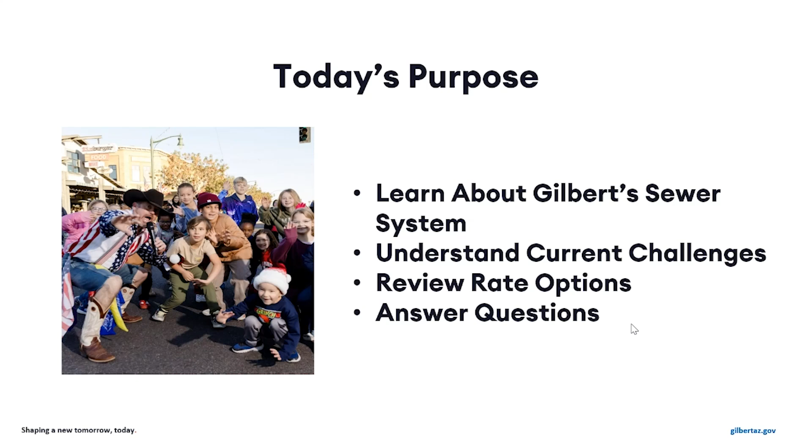We have to come face to face with the reality that's before us. Some parts of our sewer infrastructure are silently crumbling and are near total collapse. The condition of our infrastructure in maintaining reliable service is the underpinning for this entire conversation tonight.

We have 3 500-foot sections of ductile iron pipe that cross under the 202 freeway, and this one highlighted is just north of Williams Field Road. Although our goal is to inspect the entire system every 6 years, it's been 8 years since our last inspection of these pipes, and what we found just a couple of months ago was alarming.

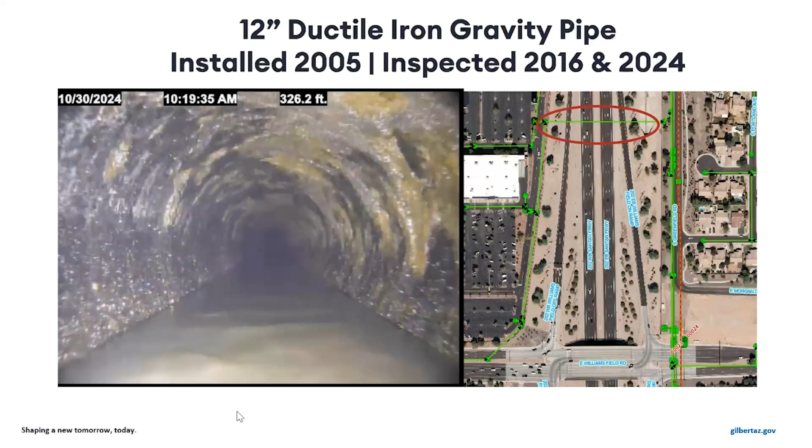These dark spots that you see are holes where the iron pipe has corroded completely away. Ductile iron pipe was a best practice 20 years ago when these lines were installed, but are not anymore due to its corrosion potential. This gravity line is inside of a 24-inch steel casing that has concrete plugs at both ends, which is containing sewage that may be leaking out of the sewer line and is helping prevent a sinkhole. But we don't know the extent of the corrosion that the casing may have as well.

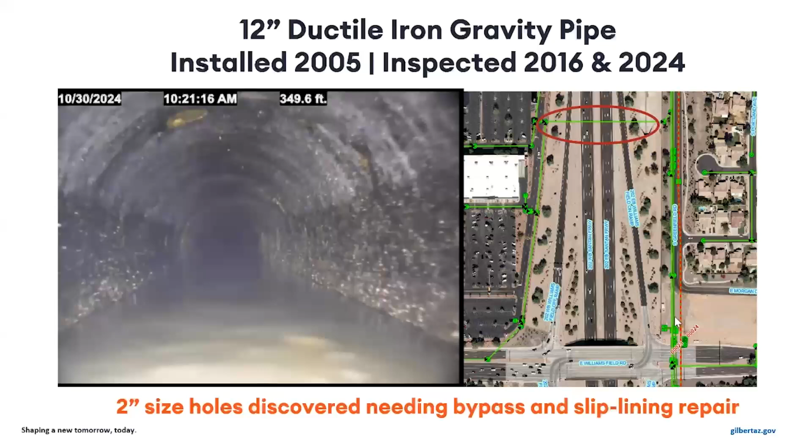Now, our team has just completed camera inspections of all 3 of the pipes that are crossing the freeway, and we're actively pursuing emergency relining. We've also expanded this inspection to other potential gravity pipelines and have already found one other significant issue crossing the railroad track. Catching this before a failure really shows the value of our routine inspections. Although these repairs will be costly, in the several million-dollar range, a sinkhole in the freeway would be life-threatening.

It's just a snippet of some of the infrastructure that we're dealing with today in Gilbert.

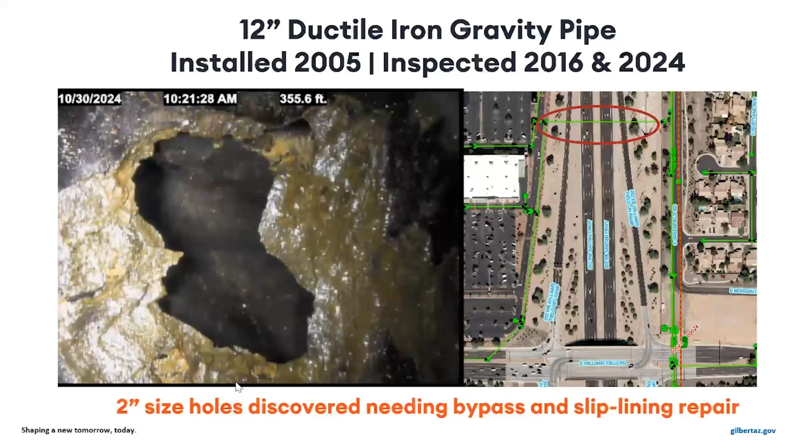Now, there's an infrastructure funding gap that is national in scope. Every 4 years, the EPA sends Congress a report on infrastructure funding needs for clean water utilities, which are synonymous with sanitary and storm sewers. The EPA also does a survey for drinking water, which is separate from the one before you here. The EPA provided the estimate of $630 billion over 20 years nationwide that's needed to bring these sewer systems back into the acceptable range for functionality.

And Arizona's portion of that was $4.8 billion. So this issue is not unique to Gilbert, but we are aggressive in keeping our promise to the community for quality service, which is why we deal with our funding needs head on instead of passing them on to future generations.

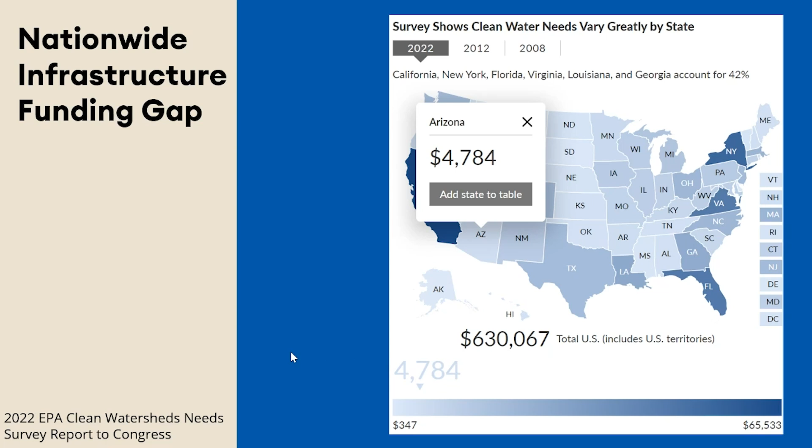Now, oftentimes when you make a personal or a professional or even a team goal, you visualize what you want to become. We definitely do that in Gilbert with our City of the Future metrics and our performance management program. But sometimes it's more instructional to look at real-world examples of what you don't want to become to help guide your decision-making on the path you do want to take.

Johnson Utilities was just a few miles southeast of us in the San Tan Valley, and they were plagued with sewer overflows, undrinkable water and high utility bills for many years.

Finally, the state took regulatory action and forced the sale of the utility to another private company called EPCOR, and they're making significant investments to bring the infrastructure up to standards. Sewage running through backyards and washes is not what we want to become in Gilbert. So tonight I'm going to share with you some of our pains as well as our plans to making sure we are a reliable and environmentally stable sewer and reclaimed water utility.

Well, here we are again talking about a rate process. And it probably feels to you like there's been a significant rate increase every year for the past 3 years. That's because there was a 12-year gap with only one rate increase during that time, which left these utilities well behind in keeping pace with our rising expenses and cost of service.

Each year, we develop and review the budgets of all 4 of our utilities, but only make revenue adjustment requests for 2 of them each year, and only if they're needed. This year, the rate revenues are being reviewed for wastewater and for our environmental compliance fund. Last year, we reviewed water and trash service. Now, it should be noted that although these alternating year reviews are planned, it doesn't mean that we're going to bring forward a rate increase recommendation each time. You can see that we even reduced the trash rates in both 2012 and in 2018. We always base our rate recommendations on the needs of the utility, along with the best available data to support those needs at the time that we made the recommendation.

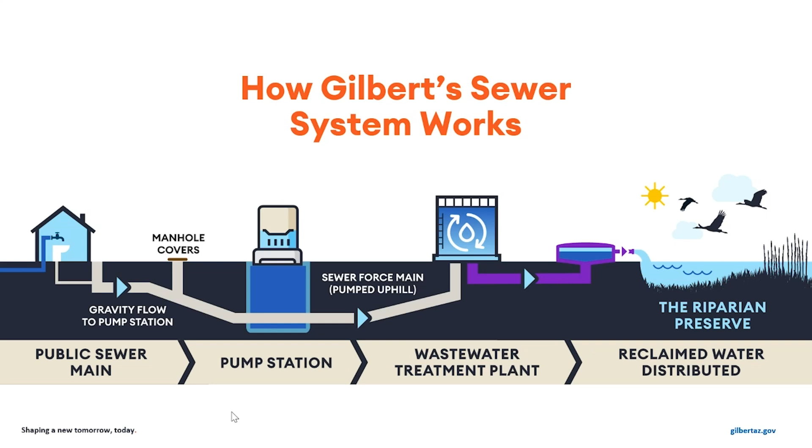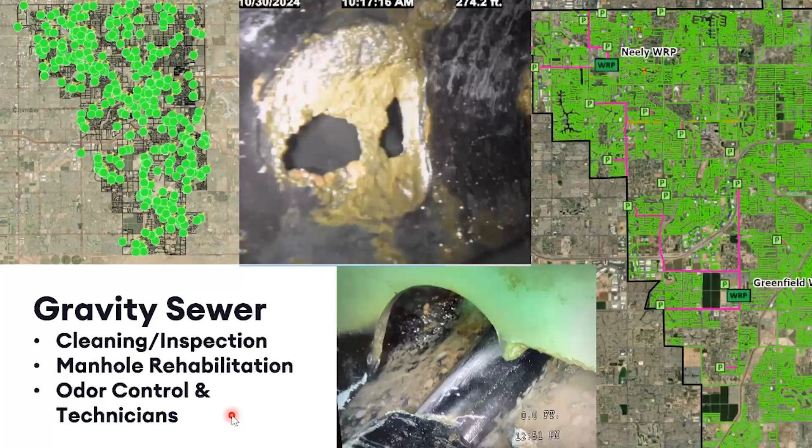We do a lot of cleaning and inspection work on the gravity sewer system, which helps mitigate highly corrosive sewer gases that eat away at the infrastructure from the inside. And those sewer gases are also a nuisance for the community. Inspections help identify small issues before they could become big, like the photo at the bottom, which is a pipeline that has been bored through that our team discovered before it became a big problem. And sometimes they uncover big issues before they become catastrophes, like the video that you saw at the beginning of this presentation.

Those inspections also help us identify future problem areas that can be corrected with capital projects, like our manhole rehabilitation project, which will fix hundreds of compromised manholes. They also guide our new odor and corrosion control stations in response to odor complaints we've received. Our plan includes additional future staffing to maintain those stations, which will be both proactive care for our pipes and a quality of life improvement for the community.

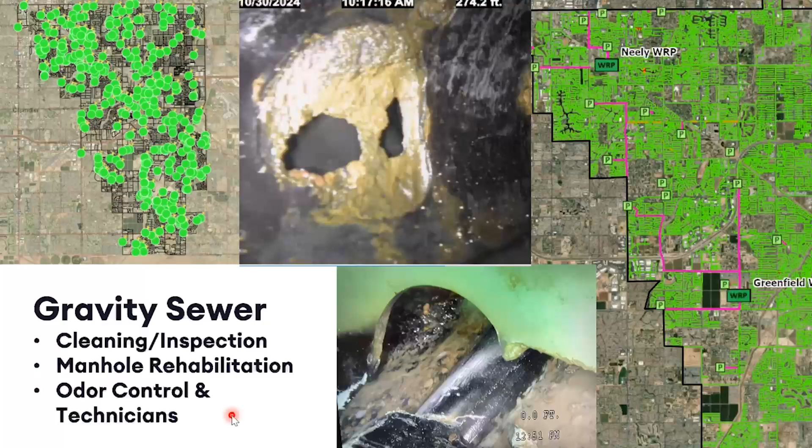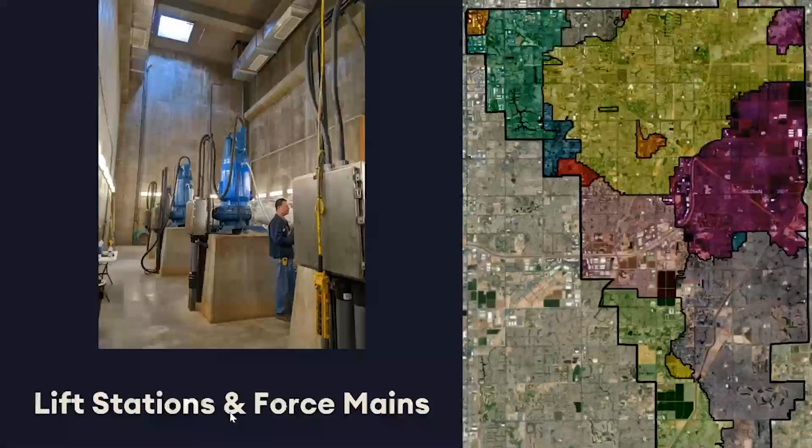As I mentioned before, lift stations are a vital function of our system. This photo on the left is of our largest lift station, called Crossroads. You can see the very large pumps behind Roy and the force mains that lift that sewage to where it can be pushed to a gravity sewer to continue its journey to the water reclamation plant. That facility is 5 stories, and that skylight you see is actually at ground level. It's all below grade.

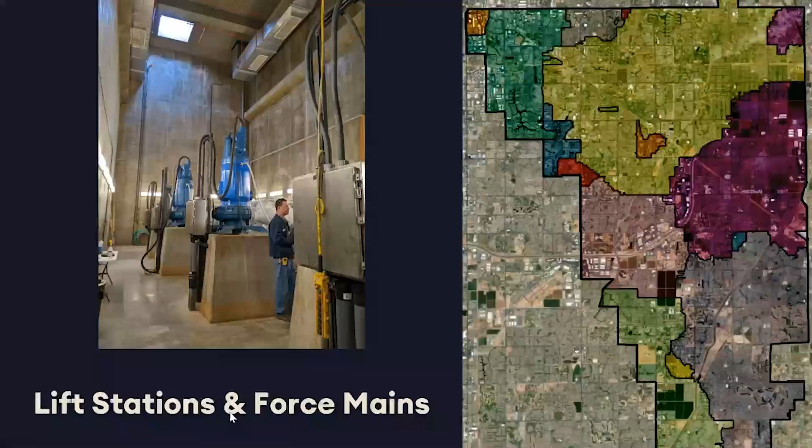The map on the right highlights the lift station sewer sheds in Gilbert, showing that over 60% of our sewer flow passes through at least one lift station on its path to the plant, which is an indicator of how vital those lift stations are to uninterrupted service.

Lift stations are costly to run and maintain compared to gravity sewer lines, which is why we try to avoid their necessity in new developments. Unfortunately, breakdowns are a normal part of this kind of infrastructure, which is why our team does daily inspections and maintenance on the equipment to help us identify potential issues before they become calamitous.

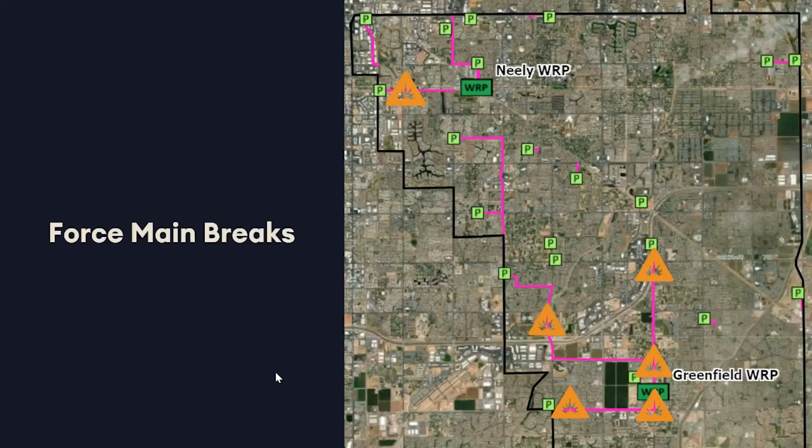We have had numerous calamities of these force mains just in the last decade. These are going to pop up on the map. The first one was at Greenfield Road and Queen Creek back in 2015. That issue cost $2 million for us to fix, which was likely only a $300,000 fix if it wasn't an emergency situation. In all of these emergencies, the cost to fix something is exponential compared to routine replacement. In all, these emergencies cost $18 million in today's dollars to fix.

And those didn't even solve the underlying issues that led to the breaks in the first place. That was $18 million in Band-Aids.

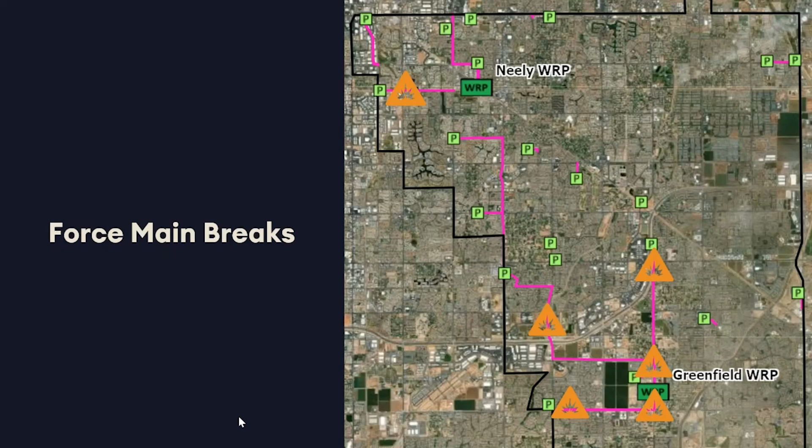There's also an above ground impact that happens when these force mains break. Sewage only flows one direction, so we have to set up bypass pumping in cases where the rupture is big enough and complicated enough that the repair will take some time. In this case, these bypass pipes were in place for several months, crossing Queen Creek Road.

Rivers and ponds of raw sewage running through gutters and into landscaped areas are not the kind of water features we want in Gilbert. And we know that you, our residents, want us to prevent them as well. These rate investments will keep us on the correct side of your desires for quality of life.

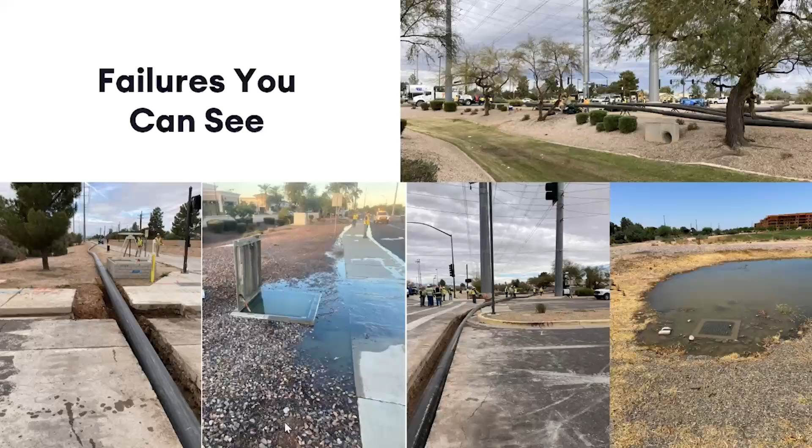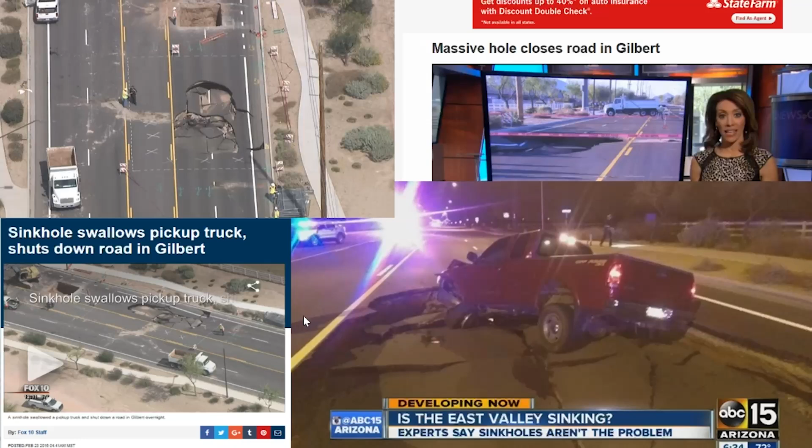The media loves a sinkhole because it's an obvious sign of a service failure, and we have gotten that coverage too. Thankfully, nobody was injured in this incident, but there was a strong possibility of that happening.

This particular instance led us to do a condition assessment of our force mains, and we developed a prioritization list for rehab and resiliency of our force mains. We developed a subsequent capital improvement project to make those necessary improvements. It's a costly but vital series of projects over the course of 12 years to accomplish resiliency and reliability for our sewer customers.

This project is called WW1050. It's a systematic replacement of those ductile iron pipe force mains that are the most likely to fail. As I mentioned earlier, it was an industry standard to install ductile iron at that time, but improvements in manufacturing technology for large diameter plastic pipes now means that we can replace those old standards with materials that will not corrode like the ductile iron. Those force mains are a single point of failure for us, meaning there's no backup in place if one of those points fail, and we will be in emergency operations.

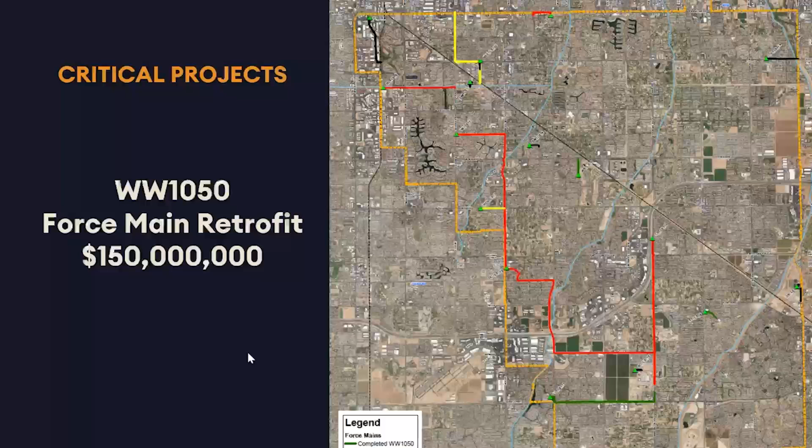Well, we finally made it to our water reclamation plants in our journey, and we have drilled down with our council into the operations of the Greenfield Water Reclamation Plant. We've shown them that the operation and maintenance costs of that plant over the next 5 years average $3.5 million above our previously budgeted amounts. This is due to a lot of contributing factors, including increased costs for chemicals, energy, and materials for the processes, growth in Gilbert's flow to the plant, and higher staffing costs.

Additionally, we keep reinvesting into this plant so we get the full useful life out of this facility in order to maximize ratepayer return on their investment. These upward costs affect our need for more revenue per customer.

We also have to do some reinvestment ongoing at the Neely Water Reclamation Plant, which is Gilbert's other plant. We have a need to bring that plant back in line with the service standard that this community has come to rely on.

Well, now that this water has been purified, we send it out through our reuse system, which is a foundational element of our sustainable water supply in Gilbert. Our goal of 100% reuse is achieved through direct use in parks, golf courses, and HOA common areas, and then the recharge of the remaining reclaimed water into the aquifer. We've got a separate pipeline network for this water. We call it our purple pipes because they're actually purple in the ground to delineate them separately from our drinking water pipes. The riparian preserve is a vital resource for our water sustainability, which enables our full use of reclaimed water by recharging the aquifer and therefore maintaining equilibrium with our groundwater pumping.

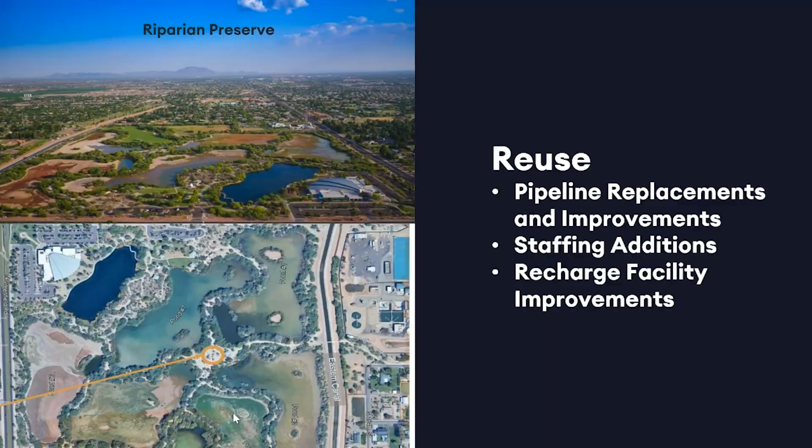Okay, we've made our way through the sewer and reclaimed water system, and now we're going to dive a little deeper into some of our capital improvement plans. We have two types of capital plans that are funded solely by rates: the operations plan and the repair and replacement plan. You can think of the operations fund as an asset that is adding a new service level, like one of those odor and corrosion controlled dosing stations that were not included in the original construction. A repair and replacement fund is when we are fixing an existing lift station pump that needs replaced because it's breaking down beyond repair. So repairing and replacing existing assets.

Now, growth-related projects are not included in the rates. They are not funded by rates. Therefore, we're not discussing any projects that are growth-related today.

Now, there's a lot of information on this slide, and I don't expect you to be able to read it, but I'm just going to describe for you what this is. This is a list of all of our capital projects in the operating and the repair and replacement fund and the years that they were slated to begin. Notice that our 5-year plan, as originally constituted, had most of the projects planned in fiscal year 25 and 26. This is a visualization of what a backlog looks like in a plan. Many of these projects were planned for fiscal year 23 and 24 in our last rate plan.

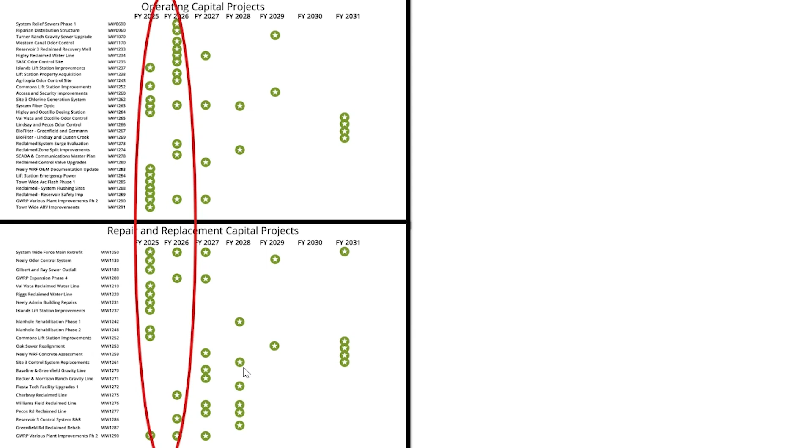We had to push almost all of the projects off for 2 years, which we then added to the ones already planned in those years. This glut of projects creates a real financial bump in the near term, which would have had a direct customer bill impact. So we've smoothed out many of those projects to also smooth out the financial impact for our customers. We had to balance the risk of pushing off these critical projects with customer impacts, both of monthly bills, but also the risk of interrupted service and environmental damage potential.

This represents a $38 million delay of projects in our operating fund and $96 million of delay in our repair and replacement fund, just to soften the rate increases to the extent possible without compromising the integrity of our services. These delays were not incorporated, the rate recommendation would have been even higher.

That initial capital plan represented a 160% rate increase. But we've left as much of that plan on the cutting room floor as possible through our risk and benefit process to get to the lower rate increase options that will be presented to you today.

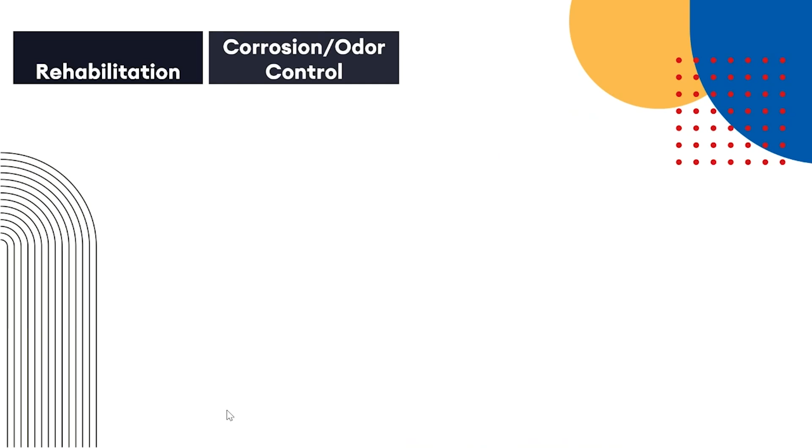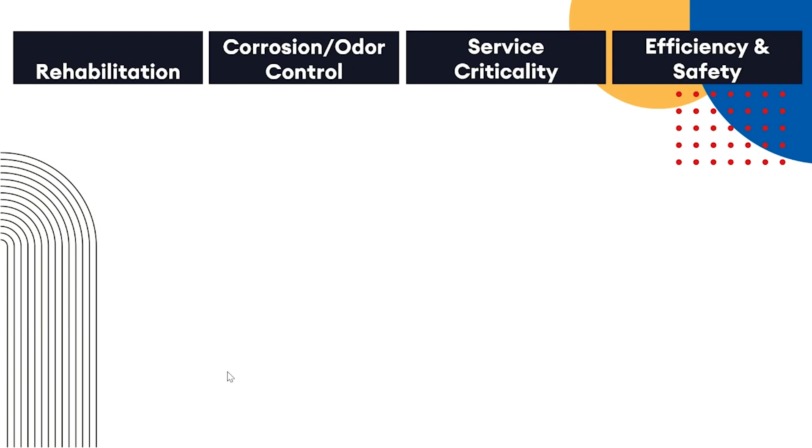Now, I realize that previous slide had so much information it could be overwhelming. Looking at a list of dozens of projects can be difficult to sort through. So here's another way to visualize the categorization of these projects. We've got 4 main categories: rehabilitation, corrosion and odor control, service criticality, and efficiency and safety. It's a little easier to understand the goals we're aiming to achieve when looked through this lens.

So when we add in the bullet list of each of these projects, it provides context for the criticality of these projects. As an example, take one of our odor control projects, say the Western Canal Odor Control Dosing Project. The impact for the area nearby and downstream of that site will be enormously improved. The Heritage District is directly downstream and will benefit. We heard odor complaints from customers dining on the patio at restaurants in the Heritage District, and we've developed that project in direct response to those problems.

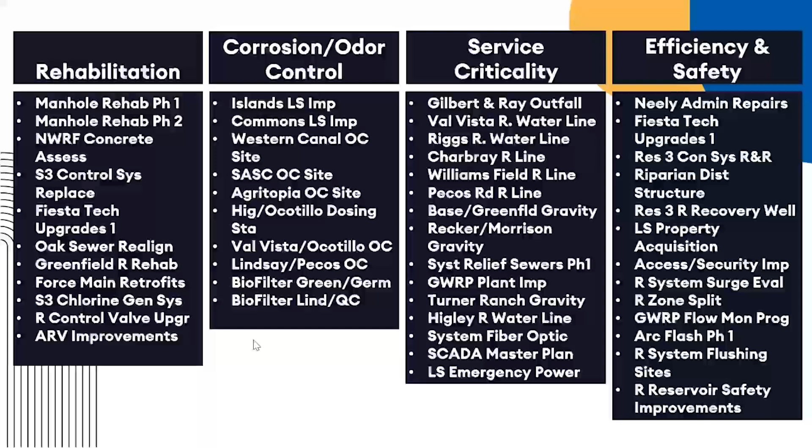The projects recommended are based on our professional opinion of what is believed to be in the best interest of the community. If we had to push out any more projects, we could have severe consequences for service reliability and quality of life for our residents.

These projects total $230 million within the 5-year plan. That's an average of $46 million a year just on capital expenses. And our total current revenue is only $48 million a year. So clearly, an investment is required.

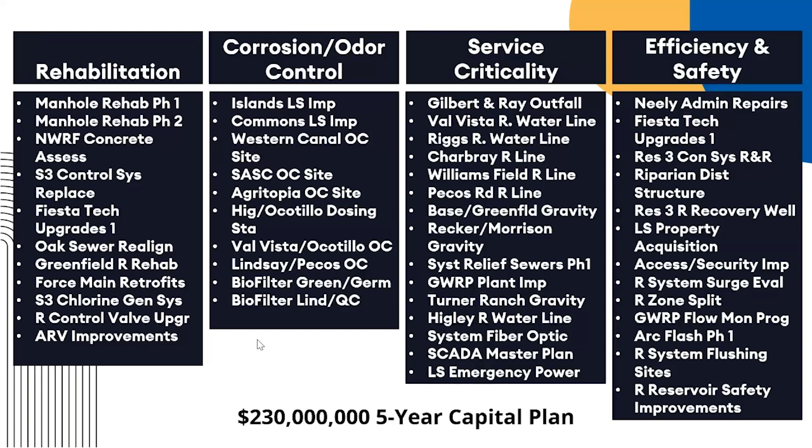So how do we go about paying for these needs? Well, let's talk about the details of utility funding. There's a few foundational pieces we need to have in place to understand the financial picture of our utilities.

The first is the difference between impact fees and rates. Impact fees, also known as system development fees, are assessed when new development occurs. These are based, calculated and assessed for expansion-related improvements, including expansion of a wastewater treatment plant or expansion of the wastewater collection system, like our sewer lines or lift stations. This makes up the adage that growth is required to pay for growth, and existing customers do not foot that bill. Impact fees are not used for operating the system, they're only used for installing the new system.

Now, conversely, tonight we're talking about rates, which are a type of user fee. These are assessed every month based on the use or level of service the customer receives. They're calculated based on our cost of service model and our rate study report, posted on our Gilbert website. The costs included are operation and maintenance of the system, commodities, repair and replacement funds like we just went through, and debt service for any existing debt.

These rates are not used to expand the system to accommodate growth. Additionally, we do not use these rates to support any general government services like police or fire, parks, or development services.

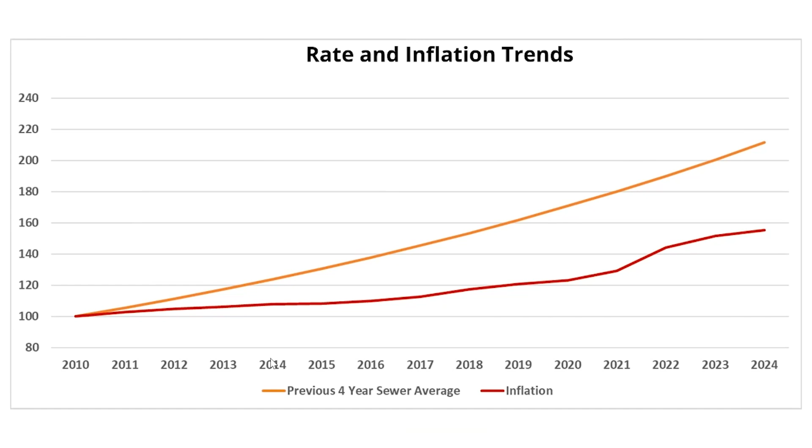Now, the Arizona Department of Transportation has a construction index just for the last 8 years, which shows the hyperinflation that we've seen in the construction industry. This inflation index is an illustration of what has happened to our capital improvement plan costs, which have far outpaced any kind of rate increases over this time.

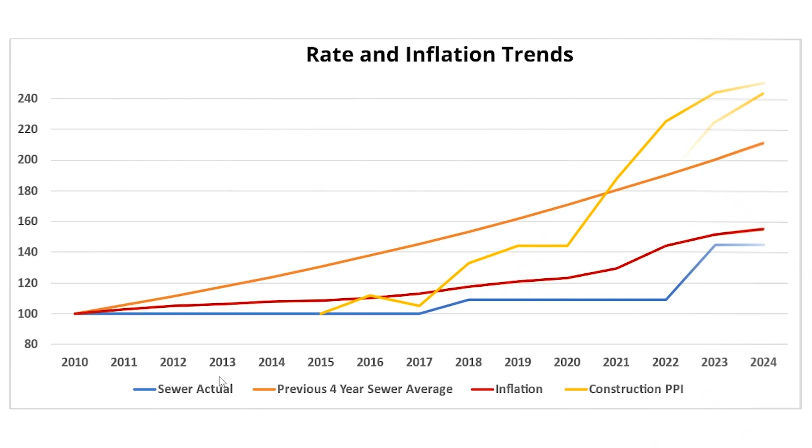Now, I'm going to add on our actual sewer rate increases over this time period. These have always been below both the national average and inflation. And this shows that our purchasing power as a utility has actually declined comparatively to our actual prices in the real world.

Now that's all very interesting, but what does this really mean in real dollars and cents? When we fill in the amount of rate revenue that we have foregone in comparison to inflation, we find that we've missed out on $67 million in purchasing power over the last 14 years. That's nearly 1.5 years of rate revenue over that time period.

If we did that same calculation for the construction industry, it's $133 million below what we have collected. This illustrates that our investment into the service have not kept pace with the cost of operations or of constructing improvements. But we have plans to rectify this.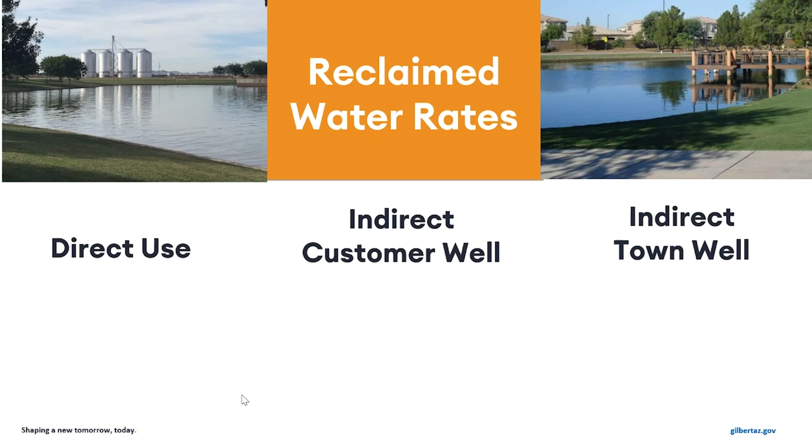Now lastly, reclaimed water service is part of this fund. We have 3 separate types of reclaimed customers, and therefore 3 separate rate structures. These reclaim rates might seem insignificant to a typical homeowner, but these are large users, and their bills can add up to $10,000 a month, so these will be impactful to them. Because of that, we notified all of our reclaimed water users by special letter back in June, notifying them of this rate increase process and directing them to our utility rates website for the most up-to-date information as they were planning their HOA fees for the following year.

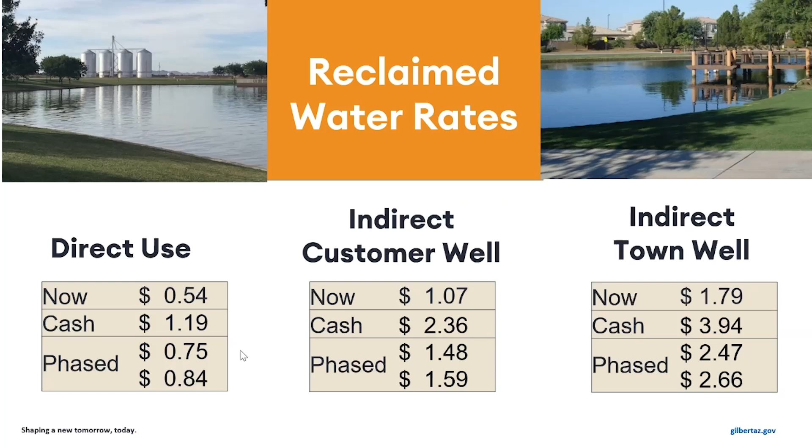As I mentioned earlier, we started this process with the Public Works Advisory Board. They're that council-appointed group of residents from Gilbert whose mission is to review and make policy, capital, and rate recommendations to the council from the perspective of residents. This group went through months of review of the wastewater plans, operations, and capital needs to understand what is needed to continue the standard of service our customers are accustomed to. They went through the rate options and weighed their values for making a rate decision on which option to recommend.

Ultimately, they decided to recommend the all-cash option to the town council. Their main concern was not kicking the investment can down the road, and dealing directly with the needs so that we are not saddling current and future customers with debt, thus resulting in the cash option recommendation.

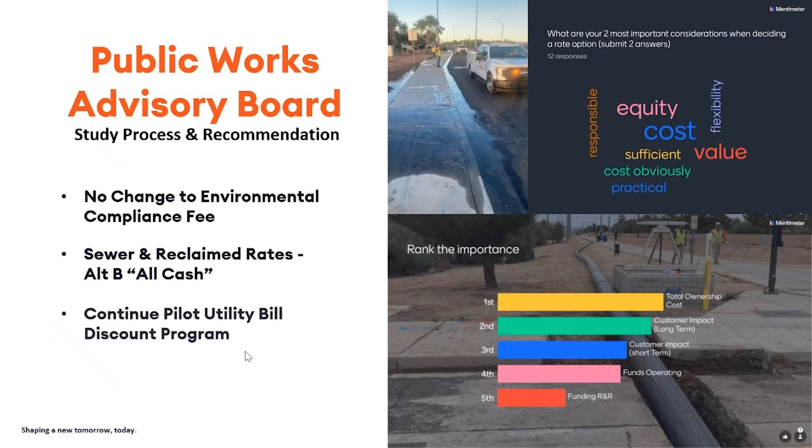The Public Works Advisory Board had a tough decision, and the one motivating thing they kept coming back to was the needs of the utility. I want to remind you what these rate dollars go to do: they are the building blocks of our services, supporting proactive maintenance and replacement of the infrastructure that's the foundation of our way of life, and also helping us respond to emergencies when infrastructure fails. Without additional funding, we will lose ground on proactive maintenance and have more frequent and more impactful failures, which will be disruptive to the community and more costly, even in the short term.

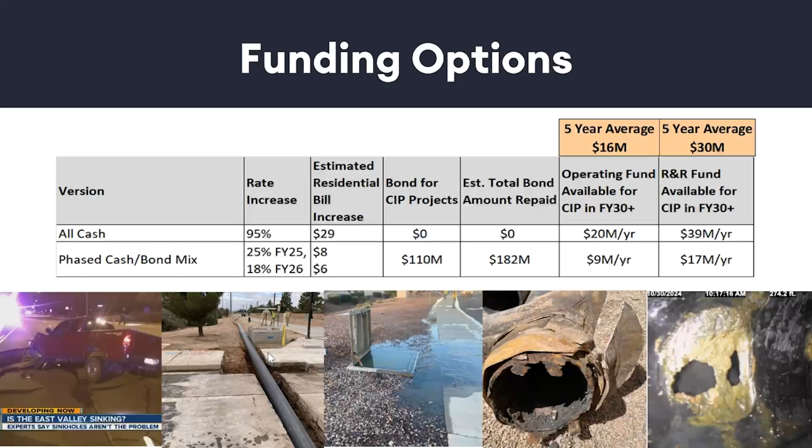Now, these are the rate options that are under consideration for the wastewater service, for sewer service. There's one more rate recommendation that I haven't mentioned yet. You might have caught on to it: the Environmental Compliance Fee. This is our stormwater and air quality service.

All right. We've gotten through all of this presentation, and now it's time for your questions. So I want to close with this comment.